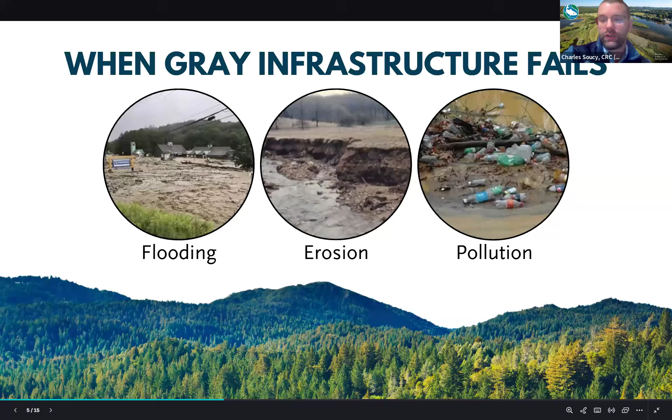So when gray infrastructure fails, what happens? Well, as we've talked about already: flooding, erosion, and pollution. And what I want to outline is sort of what is the cost of this. When this fails, what happens?

So the EPA estimates that urban flooding costs the US over $9 billion annually. Many communities throughout our watershed have definitely been impacted, all the way back to Irene and way before, but also much more recently - 2023, 2024, we had some serious flooding issues that caused lots and lots of damage.

Erosion - the U.S. Joint Economic Committee estimates that the annual erosion-related costs in the U.S. are between 180 and 495 billion dollars on an annual basis. Erosion that threatens buildings and infrastructure, homes, properties, livelihoods, etc.

And then pollution - the EPA again recognizes stormwater as the only source of water pollution that is growing nationwide, but also estimates that the investment needed to be able to handle the water pollution that we currently have on our plates, and is coming along, would bring to the tune of $67.2 billion of investment needed over the next two decades.

So our gray infrastructure, our traditional stormwater infrastructure, is definitely coming up short, and we need to find better methods to deal with these issues.

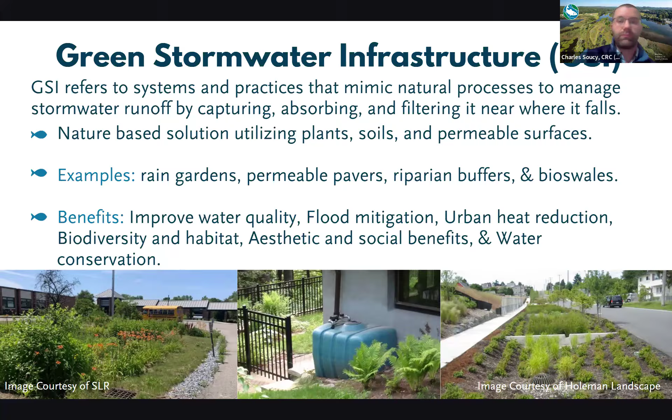So that's sort of the context and a bit of introduction I just wanted to give to set the table here. So I'm gonna pause here for a bit, hand it over to Lys. They will go through a bit more detail of green stormwater infrastructure, their work in Connecticut, and really I'm excited for Lys's talk because you all get to see what this looks like in practice as opposed to a concept. So let's take it away.

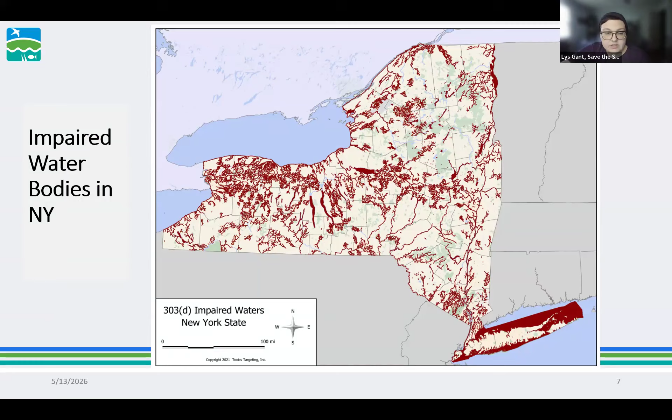And then just to give you a more geographic context of all of the regional work we do, because we also do work within New York, highlighted in red here are the impaired water bodies found within New York State, of which there are around 50 water systems that are impaired.

So you might be wondering, what makes a water body impaired? When we're talking about impairment of water bodies, we're talking about some sort of chemical, physical, or biological change that can cause environmental degradation. There are physical components that can do that. For example, dams or culverts, things that can cause sediment to build up, things that can cause increased turbidity or particulate floating in the water can cause some impairment of a water body.

Anything that can alter the temperature, those are physical elements of impairment. When we're talking about implementing nature-based solutions, however, we're talking more along the lines of chemical or biological impairments.

When we're thinking chemical, we're talking things like your chlorides, your salts, your road salt, your sand, greases and oils that come from your car, your fertilizers, your pesticides. And when we're talking biological, we're talking more like bacteria colonies, macroinvertebrates, algal blooms, stuff of that sort.

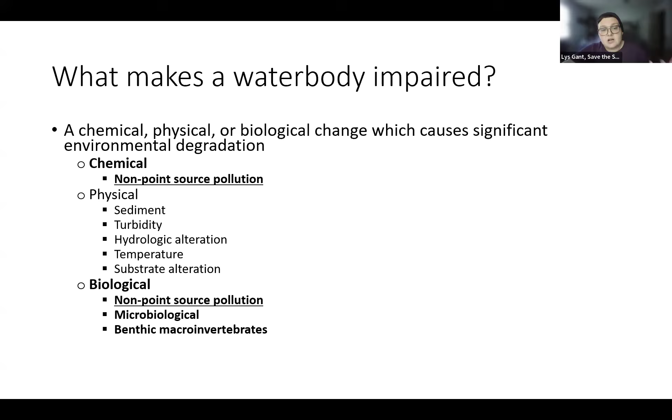All of those things can put additional burden on a water system and cause it to become impaired, which means that it's just not safe for our traditional recreational uses.

Some of the other things that can contribute to specifically the biological end of impairment, especially in urban water systems, are things called combined sewer overflows. For those not familiar, a combined sewer overflow, or CSO, is an antiquated sewer processing system, which essentially means that not only do you have a system processing what comes from homes and businesses in the way of sewage, so brown water, you also have gray water from homes and businesses, like shower water and sink water, and also contributions from our stormwater systems.

So all of that water is going into one pipe, where in an ideal world it ends up at our water treatment plant, gets processed, and is discharged. However, given the antiquated nature of these systems and ever-growing populations, especially in urban areas, these systems are no longer equipped to handle the capacity of water being put into them.

We also need to start factoring climate into these equations. For so many reasons, we have this increase in material ending up within these sewer systems that it can just no longer handle — it doesn't have the capacity to handle that amount of material coming into the system.

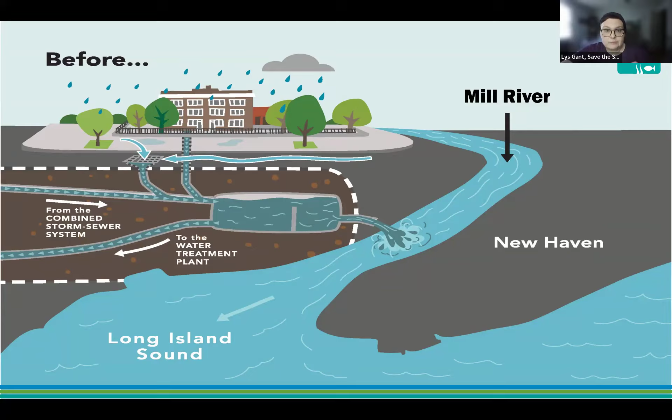So all this to say, there's a lot of water ending up in our water bodies — some of it's contaminated, some of it's not. So what do we do to help? What can we do to manage that stormwater falling a little closer to where it falls, to maybe alleviate some of that burden on our sewer systems?

We look at nature-based solutions. So what I'm going to be talking through today are primarily rain gardens. I'll touch a little bit on bioswales, but a vast majority of what we are doing right now at Save the Sound is based around rain gardens for capturing stormwater runoff.

If you don't know what a nature-based solution is, it's a landscape feature meant to mimic nature, and we use it to collect and infiltrate stormwater runoff. Rain gardens can come in a variety of shapes and sizes.

Residential rain gardens, which I'll talk about a little later on, usually entail some sort of downspout disconnect — taking stormwater that would otherwise land on your roof, go down your gutter, down your downspout, out onto your driveway, into the road, and eventually into the nearest body of water. We disconnect that and redirect it into a rain garden, which is a pretty cool system at a residential level.

When we talk about municipal implementation of these sorts of installments, it's usually pulling stormwater off of things like lots and right-of-ways — we've done some large buildings too. These spaces are usually filled with native plants and shrubs, which help facilitate that infiltration process.

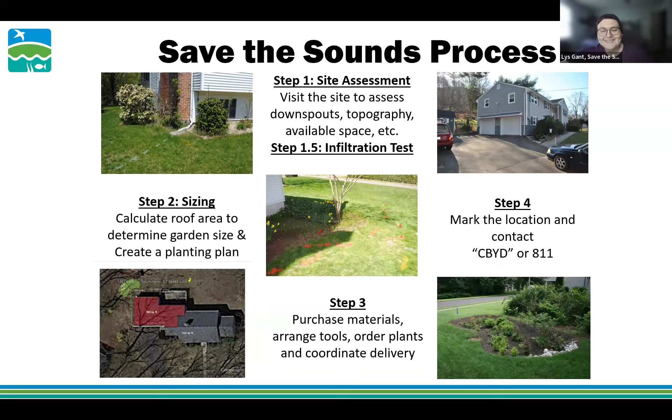Once we have all those steps out of the way, we have to recruit volunteers. Our operation for the residential rain gardens is largely volunteer led. We have at max 1 to 2 staff on site for these. Usually it's just me on site, and a cohort of volunteers.

Neighbors, friends — it also adds an additional bit of complication to things because, of course, volunteers are always really excited about the project and then they get on site and realize they're going to be digging for 3 hours. You get a mixed bag of volunteers. Sometimes you have some really incredible groups that crank through a garden in an hour and a half, which is just crazy awesome. And then you have some where you have a group of maybe college kids that aren't super enthused about being in the dirt and they take 5 hours to just dig the garden.

So, suffice to say, working with volunteers is definitely tough, but it can be really fulfilling. And if you get a good group, you end up with a really incredible installation that gets knocked out in one day, which is really satisfying, especially for the volunteers to see that they go from this lawn that wasn't really serving a purpose to a beautifully planted, functional space that they had their hands in creating.

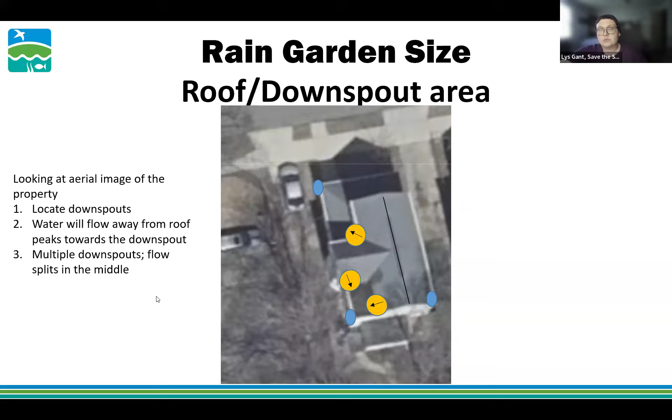Generally, when we're looking at identifying a downspout, we're also looking at the proximity to whatever space we'll be putting the garden in. I'll elaborate further in a second when I pull up my next slide.

So if you see the image on the right now, it shows the division of the roof, and the numbers you see in each polygon shape are reflective of the amount of square footage that each of those sections of roof contain.

The reason why we focus on proximity is because, as you can see, that back left green quadrant of roof area, while it would have been great because it's getting flow from two angles, it's picking up a lot less roof area. It also has a really, really long run to the one area where we would be able to implement a garden. So for this implementation, we ended up selecting the front section because A, we were able to get more roof area, and B, it was far closer to where we needed the water to go.

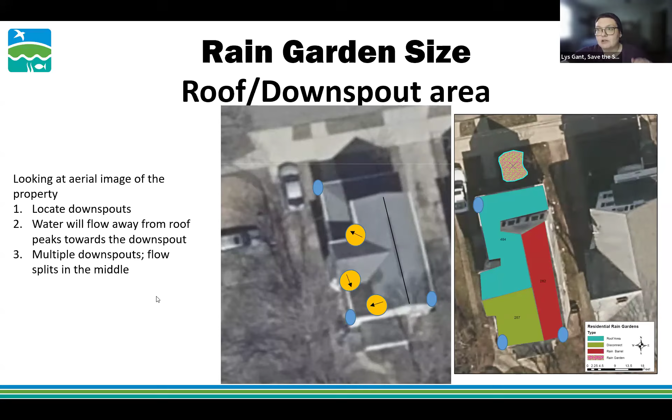That's because water is going to follow the path of least resistance, and the less distance it has to flow to wherever you need it to get, the better. Because you're going to start to lose momentum as you travel a further distance.

When we're talking about sizing, like I mentioned, you can just use Google Maps. There is a measuring tool, but what I'll say is CT NEMO, which is put out through UConn, actually has a really incredible rain garden sizing tool that they created. Essentially, you can enter in the address for the property you're looking at, and using their tool, estimate the roof area by outlining the quadrant of roof that you're targeting.

It'll not only tell you the measured area, which is an approximation so take it with a grain of salt, but it'll also suggest a rain garden size. I believe their default depth for a rain garden is 6 inches.

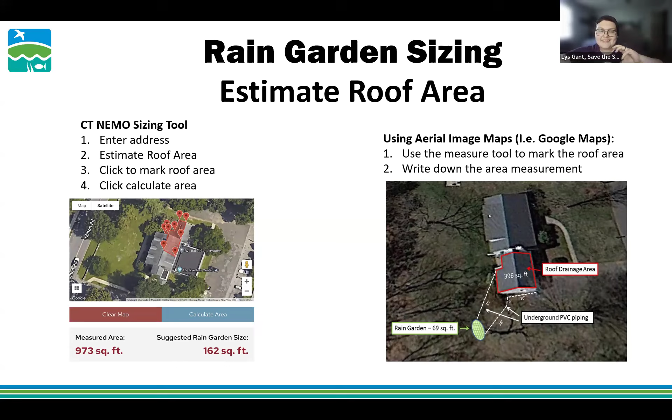We'll talk a little bit about rain garden depth in a minute, but there's a couple of math formulas you can do that will allow you to flex the size of the garden based on the depth. When it comes to sizing, there's a formula, a method to the madness, if you will.

When we're determining the depth of a rain garden, generally we are erring on the side of 6 to 8 inches, which is typical for a residential garden. The way we come to a garden size from that is we take the square footage of the roof and divide it by our intended depth.

The 6 inches is the minimum depth to be able to get 1 inch of infiltration over a 24-hour period. So what that means is if you have a 6-inch ponding area, it allows 1 inch of rainfall to completely infiltrate within 24 hours.

Contrary to what a lot of people would believe, rain gardens shouldn't actually be wet. They are supposed to function as spaces that can handle rain and then be completely dry within a 24-hour period. So if you have an area that's already holding on to a lot of moisture, it's not a great spot for a rain garden.

If you need to modify your rain garden size based on depth, or rather based on the amount of area you have available, you can make your garden deeper, which will make the surface area of the garden that's needed smaller.

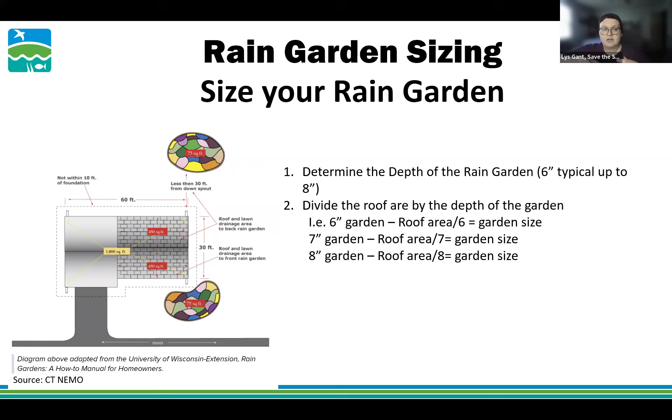When it comes to sizing, when we're talking a 6-inch depth, we're talking a bathtub, not a bowl. We want something that has a 6-inch flat depth along the bottom for the entire square footage, because water infiltrates better on a completely flat surface than if you have spots that are deeper or more shallow where you might get ponding that doesn't infiltrate. Our main goal is to make sure that 1 inch of rainfall is gone within 24 hours.

When it comes to plant selection, my perspective is we always opt for native plants. Native plants are best suited for rain gardens because they're really adaptable—they're used to our climate and weather conditions. However, we do adapt based on homeowner requests. We've had homeowners request edible plants, and some request non-native plants. As long as it's not an invasive species, it's at the owner's discretion—it's their garden, and they have to look at it every day, not us. So we cater to those requests as needed.

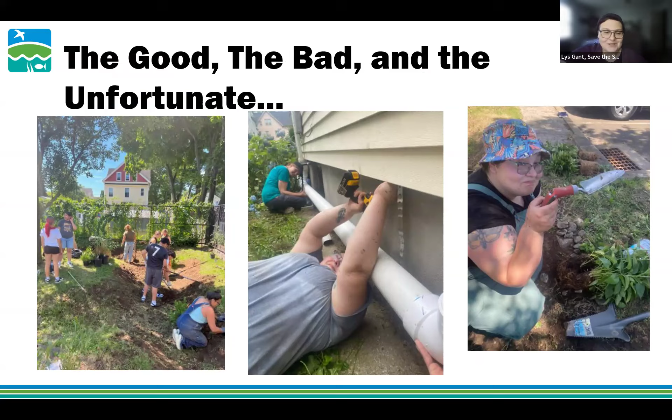So nothing is ever straightforward. You have some days that are easier than others, but in the end we end up with some really cool gardens. You also have instances where you get rained on while installing a downspout disconnect, or you have broken tools. But in the end, we end up with really beautiful garden spaces that can change people's yards for the better and get people excited about implementing green infrastructure on their property.

When it comes to maintenance, this is one of the things people are afraid of when they hear green infrastructure. They assume it's going to be more work to maintain than a lawn, and initially it might be a little bit of work.

We like to say there are two kinds of maintenance that need to happen on a rain garden at the residential level: short-term and long-term. Short-term maintenance means maybe weekly watering for the first few months, especially going into a drought or drier period. Looking out for any erosion along the banks of the rain garden to make sure plants aren't washing out or you end up with sediment in the bottom. Removing any weeds, but especially invasive species, which theoretically shouldn't need to be done within the first few months, because when we implement these rain gardens, we install 2 inches of mulch, so we really shouldn't get too many weeds coming up in that initial period.

Long-term maintenance means removing dead branches from shrubs and trees, removing dead vegetation seasonally, pruning shrubs, weeding as needed, refreshing mulch as needed, and most importantly, cleaning out the downspout entrance to make sure there's no leaves accumulating. Because as soon as you get an accumulation of sediment or leaves within your downspout, water is going to start diverting to the path of least resistance, usually out the side of the downspout instead of to the garden where it should be going.

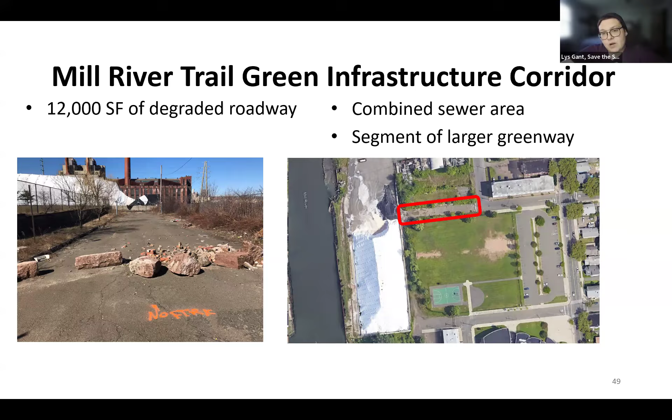As you can see, the aerial view on the right-hand side shows the stretch of road in its entirety. There are two roadways neighboring where we would get pretty significant stormwater runoff, which I'll talk about in a few slides.

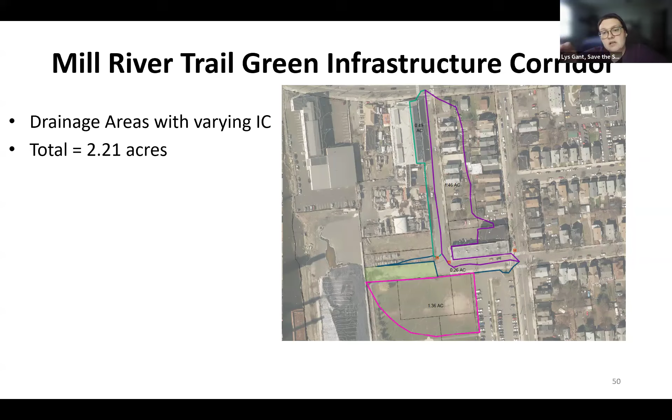So basically, when we're looking at this space, we're talking about 2.21 acres of impermeable surfaces, which we saw the potential of stormwater infiltration within. All of the areas identified outside of the green space toward the middle of the screen are areas that this space is capturing stormwater from, through multiple methods. Some of it sheet flows off the impermeable surfaces, but we also have piping that runs underneath the road adjacent to the site, carrying stormwater off of that 1.46 acres downstream to the green infrastructure site.

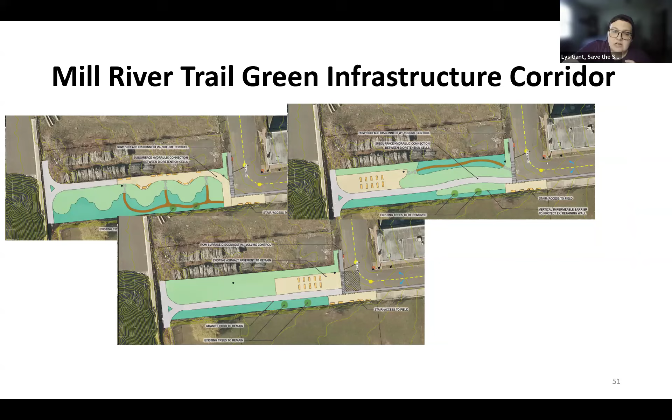There were a couple iterations of this plan prior to implementation. We worked really closely with Biohabitats to develop it, and finally came to a conclusion that looks like what we have here on the screen. We have one bioretention area on the south end of the walkway, capturing surface runoff from the street above. We also have three bioretention cells with an overflow connection that connects to the subsurface piping, taking in that 1.5 acres of impermeable surface.

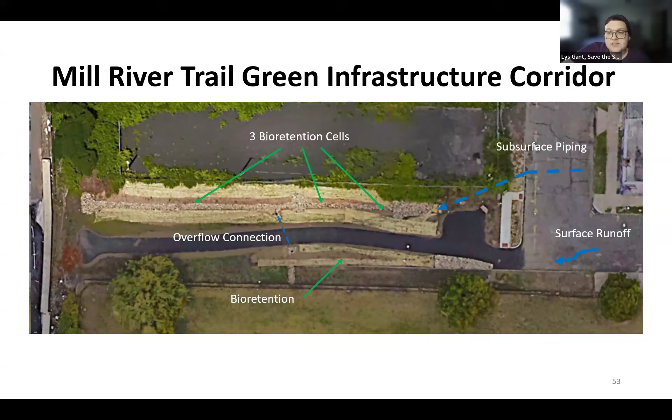So this corridor was a feat, truly. We had to completely construct the area from scratch because, as you saw in those initial photos, it was completely paved over. We ended up with a really incredible bioretention corridor.

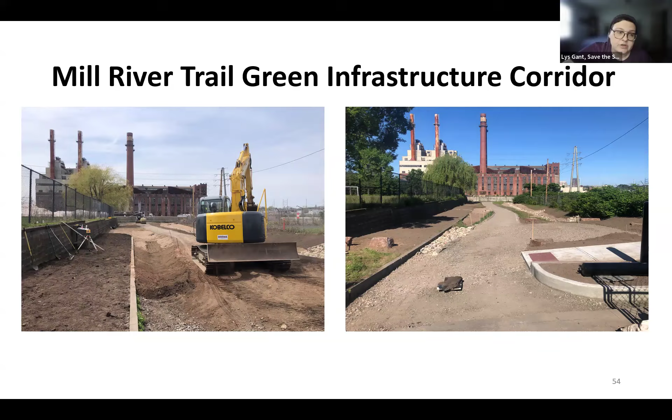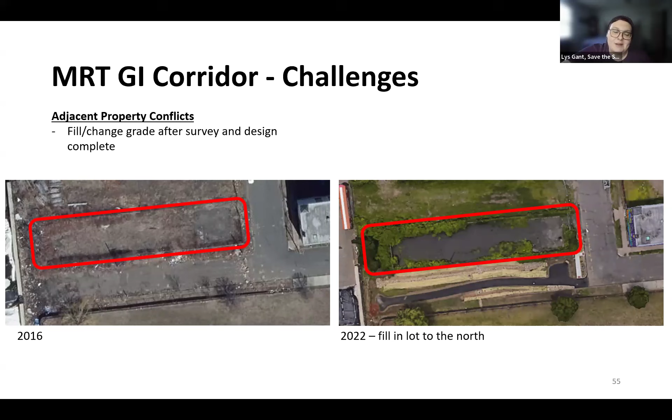In more recent developments, the owner decided to install some fencing, and through that ended up completely excavating that northern hillside by the three bioretention areas. At present, we cannot touch that side of the site because there are erosion issues we are working on remedying. We also have some additional issues.

I don't know if you noticed in that first photo, but there's a giant pile of white stuff. The Mill River of South Central Connecticut is definitely very industrial, with a lot of developed industrial and commercial lots right along the river, including the municipal hub for the state of Connecticut for salt distribution. So we have massive salt piles on both the east and west side of the Mill River, and the one on the east side butts up right against our bioretention corridor.

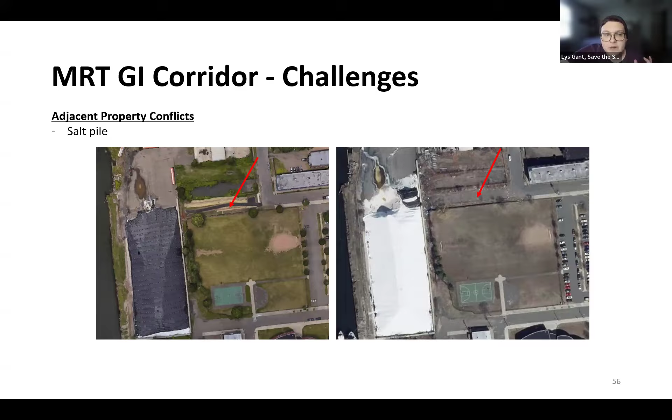It has caused some issues with salt seepage coming through the Jersey barriers at the back end of the site, which has killed off some plants. It's also constantly in flux - those piles are supposed to be covered most of the time, but oftentimes they are not, which can cause additional issues when it comes to air quality. So there's a number of property conflicts we've butted up against at this site in particular.

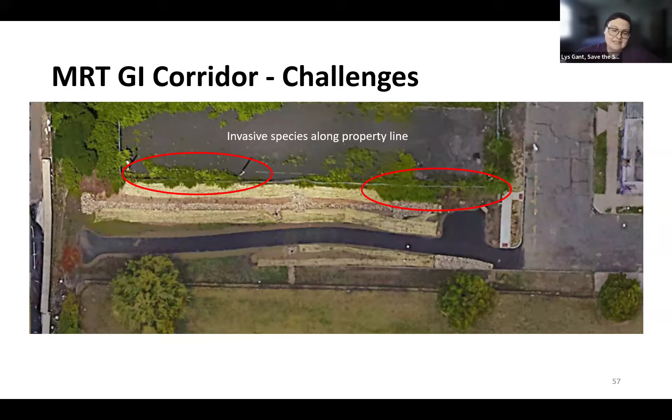We also have issues with lack of maintenance. This is a site where the intention initially was that we would implement it and other organizations had agreed to steward it long term. It just ended up not coming to fruition. Unfortunately, we finished creating the site and then were firmly in the grasp of COVID, so a lot of things fell by the wayside, understandably, and a lot of organizations and structures shifted around.

So this is a site that we have continued to steward, and it really is a capacity pull. But this is a site we're not willing to give up on because of the neighborhood it exists within. Definitely, issues of capacity, issues with developing maintenance plans, and getting people on board to do maintenance long term are a big, big need when it comes to green infrastructure.

We also still to this day deal with some dumping. The dumping has reduced to some extent, and we find that it reduces more when we have people active on the site, which I'll touch on in a little bit.

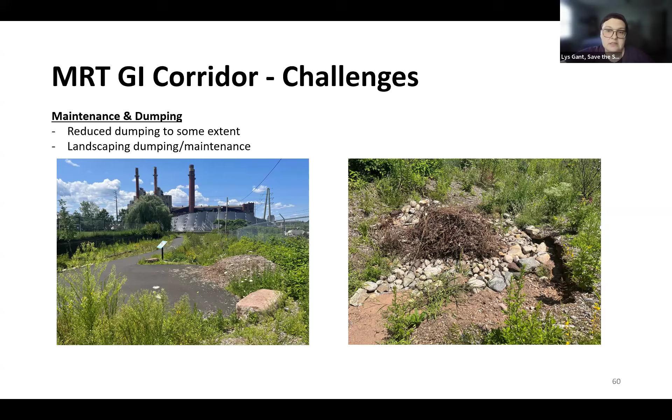That said, given all the difficulties of this space, it's a really beautiful space that we hope will eventually allow us to cultivate some really incredible learning opportunities with the middle school that's right next door, John Martinez School, and will hopefully in future work become a really incredible opportunity for folks who live in the Fair Haven neighborhood to steward a space that they view as their own.

We're also, I'm so excited to talk about this, working with an amazing group called Emerge. They're a nonprofit based in New Haven, Connecticut. They just branched into Bridgeport. It's essentially a program that works with folks who are formerly incarcerated, helps them get job readiness training, helps them get some workforce training under their belt.

We're right now working with this group on a green infrastructure maintenance training so that, A, they have marketable skills that they're able to take with them once they leave the Emerge program, and B, so that they can help us steward some of the sites like this bioretention corridor, where we need someone who has the capacity to take on that stewardship piece. They're an amazing group of guys. I just did training 3 with them the other day, and they're just incredibly excited about gaining all of this new knowledge and being able to learn a new trade, which is really cool.

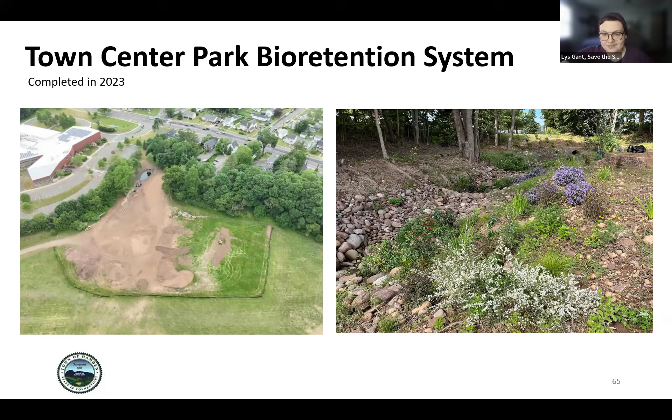This space is in a place called Town Center Park, which is like the main green hub for Hamden, Connecticut. This system was created, or was completed, in 2023. It was a labor of love, as I'm sure you'll get an impression of as we talk through the process. The rain garden is really incredible in its capacity to take on stormwater.

It is currently taking stormwater off of 73, almost 74, acres of mixed residential and commercial area that are upstream from this space, and it captures the first inch of runoff. Seeing this system in function is just incredible to watch. I have a number of videos on my phone of watching the first flush of rainwater coming through.

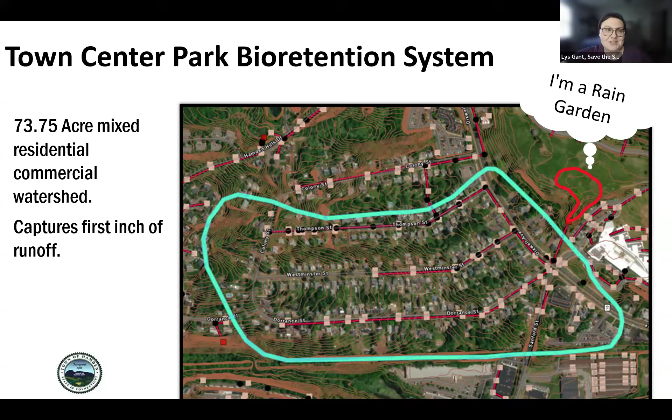So this very flat, very grassy park, on heavy rain events, would essentially turn into a lake. So much so that at certain points during bad storms, there were actually white caps in the middle of the park, because of the sheer quantity of water that was coming off of that 74 acres.

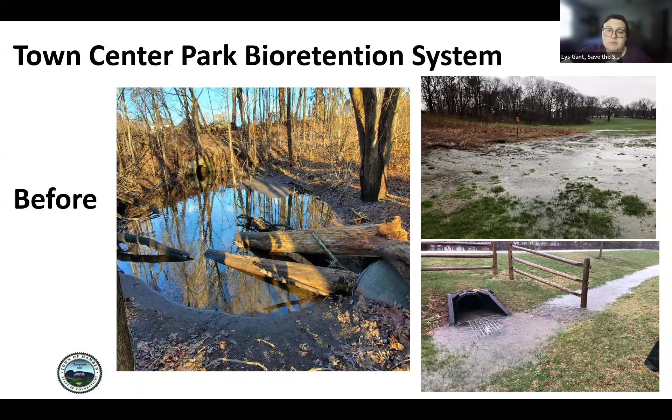So, as identified in part of the Mill River watershed plan, we pinpointed this location as being a prime spot for a large implementation of green infrastructure. So, what does that look like? Let's jump in.

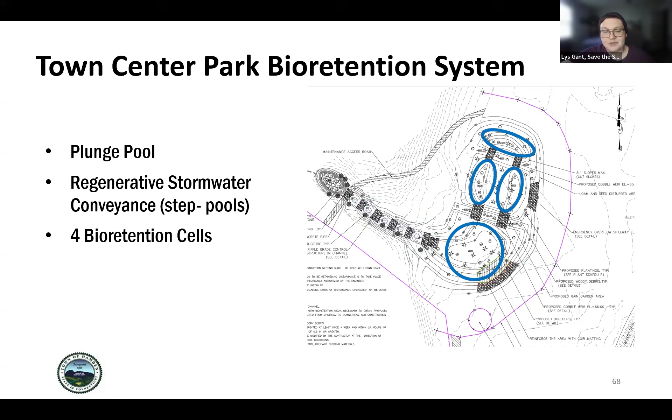As you can see from this bioretention system, there are a number of plunge pools where the water comes in and gets the opportunity to infiltrate. Then there's a step system and a number of bioretention cells. In the couple years this has been implemented, it has only overflowed 4 times, which is an incredible feat of engineering, given that during every rainstorm it was causing a deluge of water to enter the Mill River.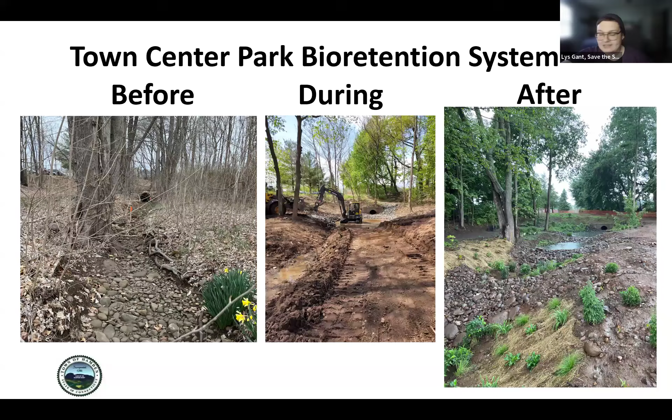This system had a lengthy process for implementation, as you can see from these photos. It was a complete overhaul of the space. This is what it looked like shortly after we finished the step system, and the following summer after all of our plantings, it looks like a completely different habitat. We started noticing changes in ecology pretty immediately, with birds and all sorts of amphibians coming in that weren't in the space before.

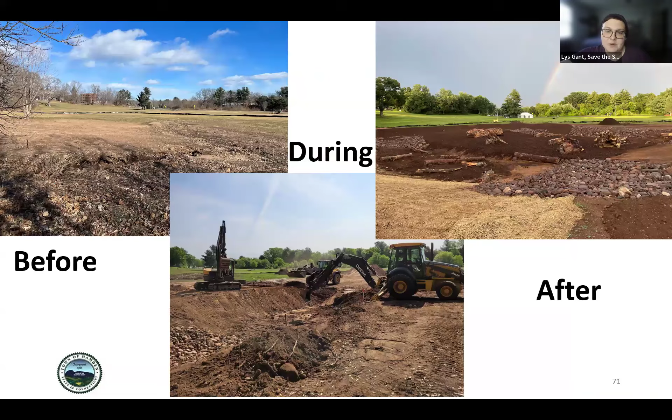This is what the main pools looked like before, during, and after. And this is what the site looked like just before completion. As you can see, there's still some plants that need to be gotten in the ground, but for the most part this is a fully planted space.

This also was an absolute labor of love. We relied really heavily on the town of Hamden for their help with this process. They did all of the construction in-house, which was incredible. But when it came to planting, there were around 6,000 plants that went into this space, and 1,500 of those were put in the ground by volunteers. This is what the space looks like today. It's beautiful, wildlife use it for habitat, and it handles a ton of water that comes off of impermeable surfaces.

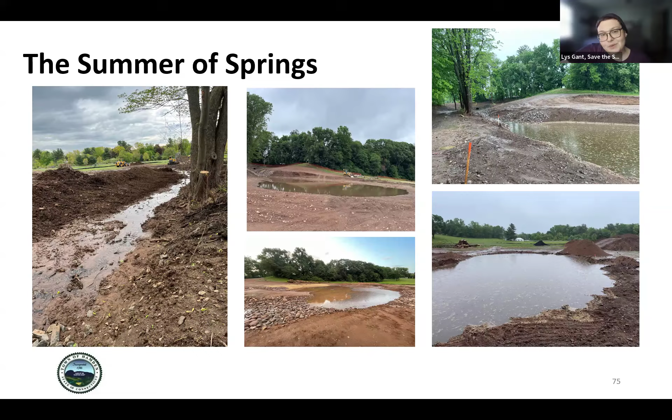What we did find is that this space was a challenge to implement for a few reasons. The season in which it was installed was one of the wettest summers on record. While that was difficult for us, it also gave us a kind of trial by fire of the system to make sure it functioned the way it should. There were also issues around equipment because we were depending so heavily on the town—when their excavator decided to take early retirement, it meant additional complication for implementing the garden space.

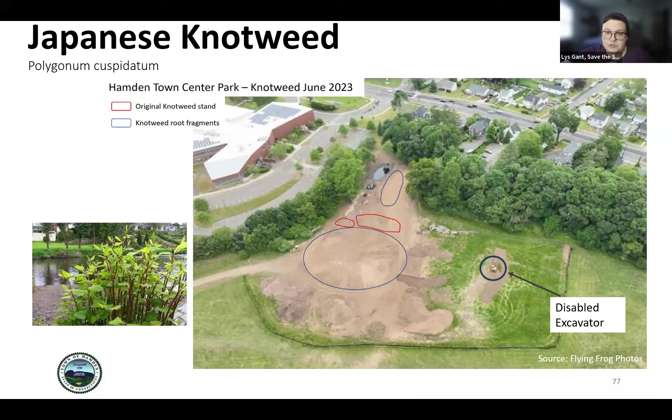We also dealt with knotweed on site. There was a dormant stand that got knocked around and kicked up during the construction phase, which activated the rhizomes, so we had to do some remediation to ensure that knotweed was stamped down before we started truly implementing the site, to make sure it didn't have the opportunity to take over. While there were frustrating aspects to this, the town engineer always encourages us to celebrate our successes, and we had a really amazing, fairly large space that is able to infiltrate around 74 acres worth of stormwater that comes off of residential areas.

So what's next for us? Right now we're doing a ton of implementation of projects in Hamden, New Haven. We're bridging out to Branford and Bridgeport. We're also working on green stormwater infrastructure planning with New York City Parks in Queens. That's the quick rundown of what's next for us.

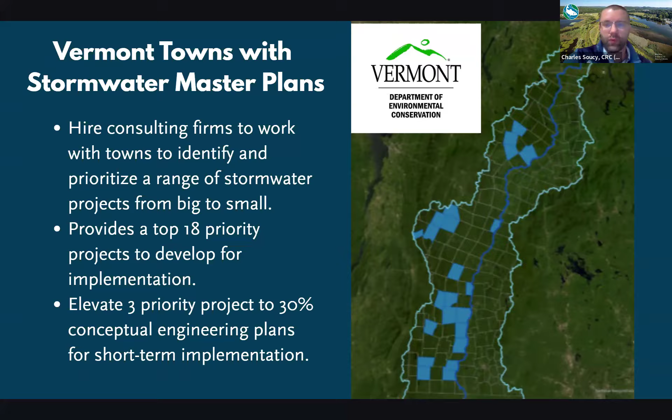And then we get to our next slide. So as we're going through these maps, you'll notice we're adding in and getting a better sense of the full area that we're working with in Vermont and New Hampshire.

So we, CRC, wrote a Long Island Sound Futures Fund grant ourselves to do work similar to what Upper Valley is doing. We abut them on their southern end and extend the work down to the Massachusetts border, shared with Vermont and New Hampshire. This is an additional 37 towns in Windham, Cheshire, and Sullivan counties. We aim to prioritize about 60 of those projects across the region and elevate about 6 of them.

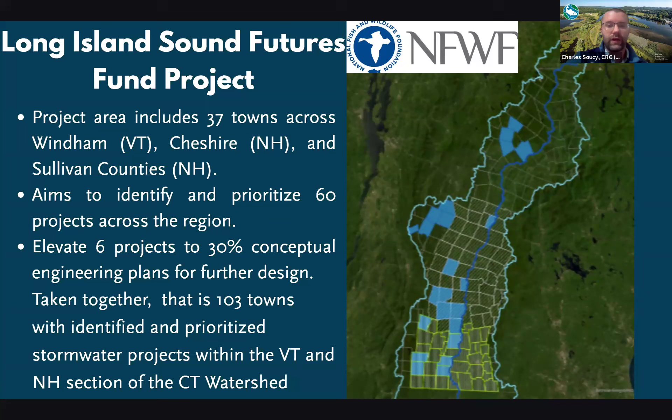Over half at this point. I wanted to highlight how much progress we've made in covering that area. Go ahead to the next slide, Amanda.

Just briefly, a little bit more detail. The project development work I started is in Southeast Vermont, looking at 3 towns: Brattleboro, Rockingham, and Westminster. For each of those towns, we're looking at 4 of the priority projects identified in the Stormwater Master Plan and elevating one of them to near 30% conceptual engineering design. This work is funded by Watersheds Vermont and will be wrapping up at the end of June this year. Go ahead for the next slide.

Keeping in mind that we have the partnership with the Upper Valley, this is our specific Long Island Sound Futures Fund work, again focusing on those 37 towns from the Massachusetts border in the south up north towards the abutment with the Upper Valley's project area. In total, this is funded by the National Fish and Wildlife Foundation through their Long Island Sound Futures Fund grant. We're partnering with natural resource conservation districts and regional planning commissions. This is a 2-year project that'll go through 2028.

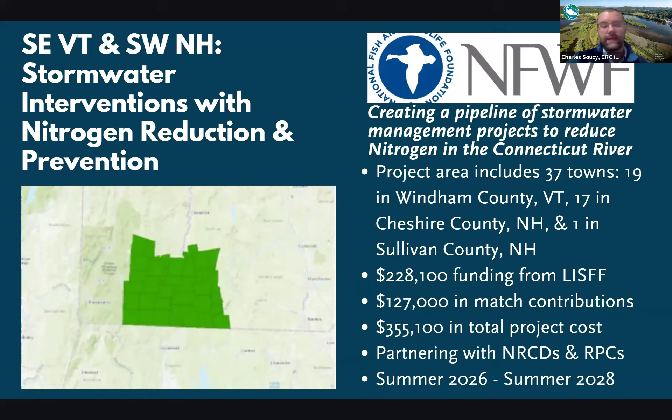Go ahead for the next slide, Amanda. So basic details: we identify the project sites and prioritize them, working with partners—RPCs, NRCDs, our conservation commissions, our lake associations, watershed associations. 6 of those 60 projects wind up getting technical permitting and design assistance to get closer to short-term implementation.

We also are going to do a community of practice similar to Upper Valley's project, where we're organizing education and networking events to bring together various practitioners—highway departments, road crews, municipal staff, and other stakeholders—to learn what green stormwater infrastructure is, see what's involved with operations and maintenance, and really foster a working community of collaboration and sharing of resources and knowledge.

And then a regional stormwater action plan that'll give a really good roadmap documenting all the work we've done, and a roadmap for the future with a timeline and resources to put the rest of these identified projects into motion towards implementation. Go ahead for the next slide, Amanda.

So how can you help? Well, as we get this rolling out, talk to your town about your stormwater concerns. One of the big things we were hoping to have Jamie, Dr. Jamie, who was going to join us today, but he reached out—he was unable to make it today, unfortunately, and regrets missing us.